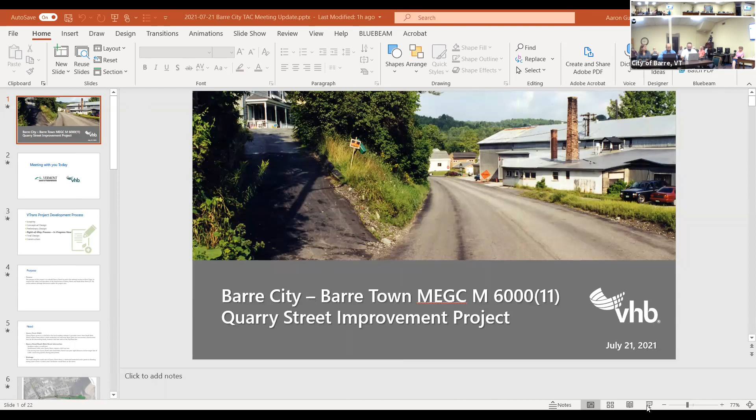Okay, we have a short PowerPoint presentation that we're going to share, and then we'll get into questions and answers toward the end. I would say though, if you have any questions about specific material we're talking about, or the slide we're on, feel free to just speak up.

So this is the Barre City, Barre Town Quarry Street Improvement Project. This is a Class 1 town highway project, meaning that both Quarry Street and South Main Street in this area, Vermont 14, are both Class 1 town highways. The project is mostly within the city of Barre. There's a small portion that's also in Barre Town. So as we mentioned, meeting with you today is Patty from the Agency of Transportation, and then myself and Jeff from VHB.

Just quickly, a reminder about the V-Trans project development process. This is the process that basically every project that's developed by the agency goes through. There's an initial scoping phase, conceptual design, preliminary design, a right-of-way process, and then final design and ultimately construction. So right now we have completed preliminary design and are currently in the right-of-way process.

Wanted to revisit the purpose and the need for the project. So the purpose of this project is to rebuild Quarry Street to match the widened section in Barre Town, to improve the safety and operations at the intersection of Quarry Street and South Main Street, which is Vermont 14, and to address drainage deficiencies within the project area. And then the need for the project is really targeting three separate areas: the width of Quarry Street, the Quarry Street and South Main Street intersection, and then drainage deficiencies.

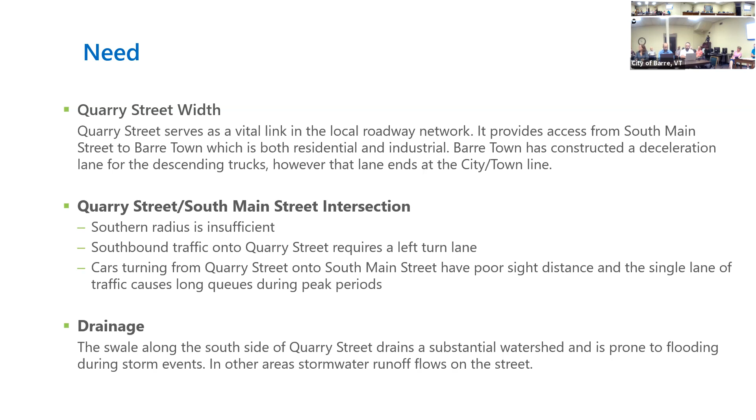And then on the drainage side of things, again, prior to any work on the project, a swale along the south side of Quarry Street drained a substantial watershed. It still drains a substantial watershed, and it's prone to flooding during storm events. And then there are other areas of stormwater runoff that just flow onto the street. Not really the best situation. So that's just a review of the purpose and the need and why the project is happening.

A very quick overview of the project here. Make sure my cursor shows up. Yep. So on the left-hand side of the screen is South Main Street. North is up. There's a north arrow on the top right here. And then Quarry Street extends from the intersection at South Main Street, past Hale Street, and then up around the corner and then into Barre Town.

A couple of things to note here. The project does meet up with the existing deceleration lane that's coming down the hill from Barre Town. I believe it ends in this area. So part of this project is to extend that deceleration lane down to the intersection with Vermont 14. And then as we approach the intersection with Vermont 14, it serves as separate left-hand and right-hand turning lanes so that we have shorter queues along Quarry Street.

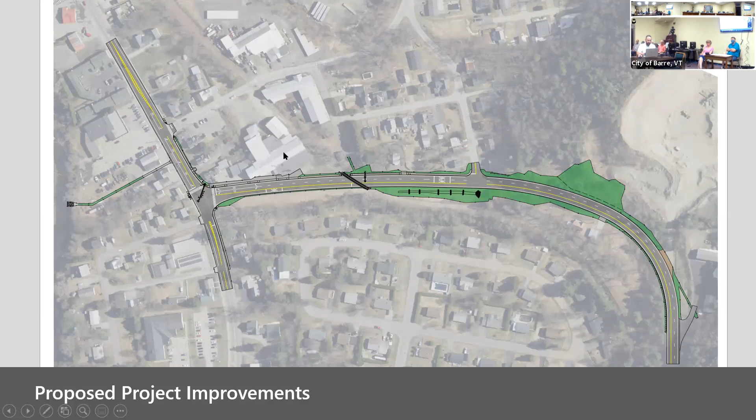Also along Quarry Street are drainage improvements, utility relocations, and an improved railroad crossing. The intersection becomes a signalized intersection. We talked about the lack of a left turn lane on South Main Street. So there is a left turn lane here shown for cars that are traveling south on Vermont 14 and turning left on Quarry Street. We'll get into a little bit more detail in some of the slides that come up.

I wanted to go through a few design considerations. So we are looking at a signalized intersection. The traffic volumes there do warrant the use of a signalized intersection. We're looking at improved intersection geometry in the final project. A portion of that has already been constructed in the field. We've talked about the South Main Street left turn lane, which would be constructed.

We'd end up with an improved typical section along Quarry Street. Right now it's very narrow. Pavement ranges from just over 22 feet to about 25 feet. And we're looking at adding 3-foot shoulders and a sidewalk along the north side of Quarry Street. We're looking at reconstructing that railroad crossing with safety improvements there, advanced warning, active warning system, drainage improvements, which will be both treatment of stormwater and conveyance of the stormwater, and then utility relocations along the corridor.

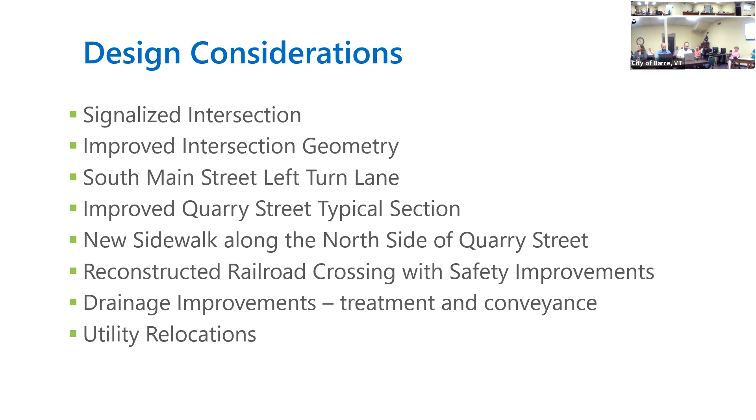So this is a zoomed in view of the Vermont 14 and Quarry Street intersection. As we said, we're looking at signalizing this intersection for the 3 legs, both the northbound and southbound on Vermont 14, as well as Quarry Street on the east. We're showing the new South Main left turn lane, which is shown a little bit clearer here in the zoomed in version.

There will be some pedestrian safety features, clearly identified crosswalks coordinated with the signal, so signalized phases for pedestrians crossing both South Main Street and Quarry Street. We've got the separated left and right turn lanes shown on Quarry Street so that cars that are approaching can navigate to one or the other lane. Again, reducing the queues along Quarry Street.

The improved intersection geometry, it was really this southern part of the intersection that was a very big concern. Previously, it was pretty much just a T intersection and trucks had to navigate into oncoming traffic to make that turn. And then improved operational safety on Cherry Street as part of the intersection improvements and the signalization. Cherry Street in this section would be converted to a one-way in. So vehicles can only enter here and then would exit a short distance further to the south.

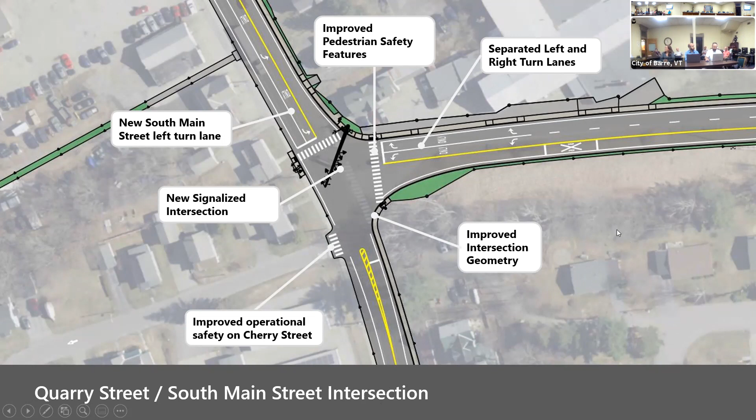This is a typical section along Quarry Street. This section represents the area between South Main Street and Hale Street. It's got the 3-foot shoulders that we talked about, 2 11-foot travel lanes in the westbound direction, 1 11-foot travel lane in the eastbound direction, and another 3-foot shoulder. Granite curbs on either side to help convey the stormwater, and then a sidewalk on the north side of Quarry Street. After we go beyond Hale Street, we don't have a sidewalk anymore, but the typical section of the roadway does continue.

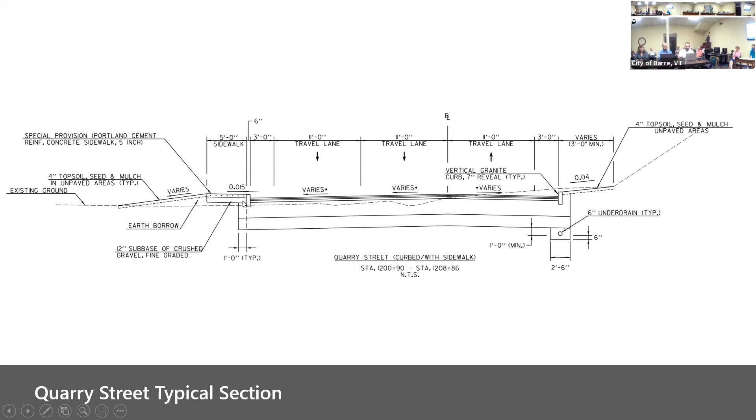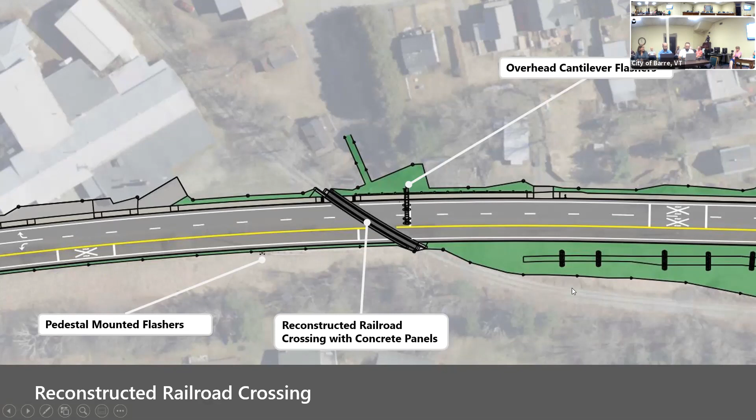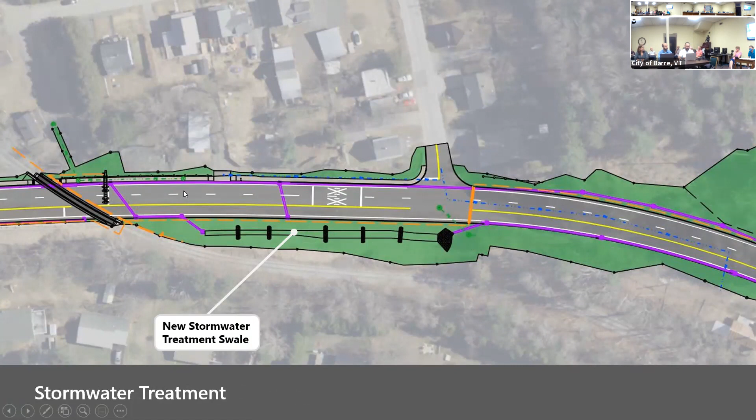So I just wanted to pause and talk about how the project has had one phase of construction in the field already to really cut back the bank here, cut back this slope to make way for the widening of Quarry Street. One of the biggest reasons we had to do it as a separate phase is to allow for relocation of those utilities ahead of the widening project. So the second construction phase was completed in 2017, cutting back that bank and installing a small retaining wall.

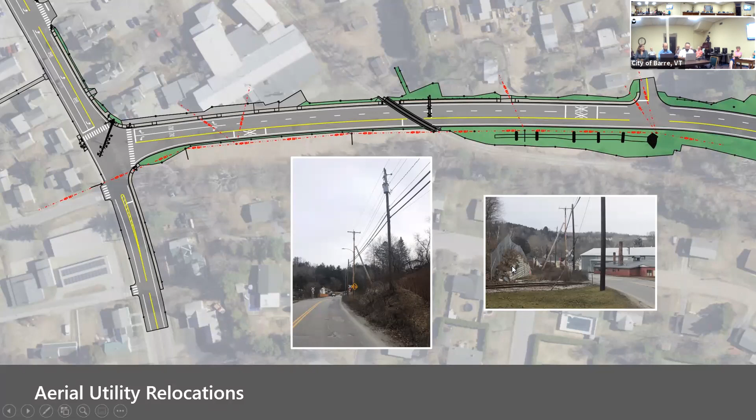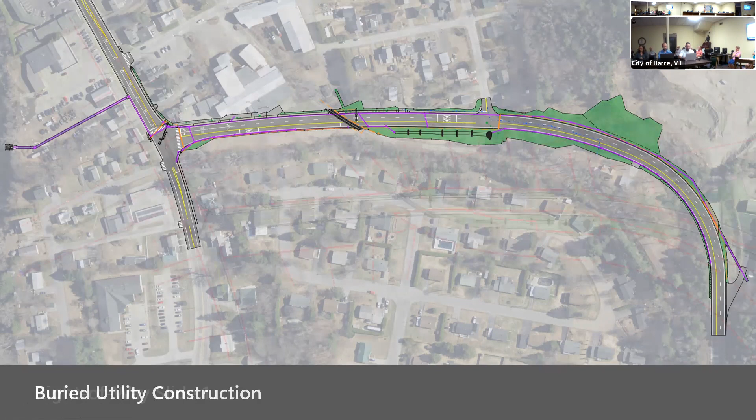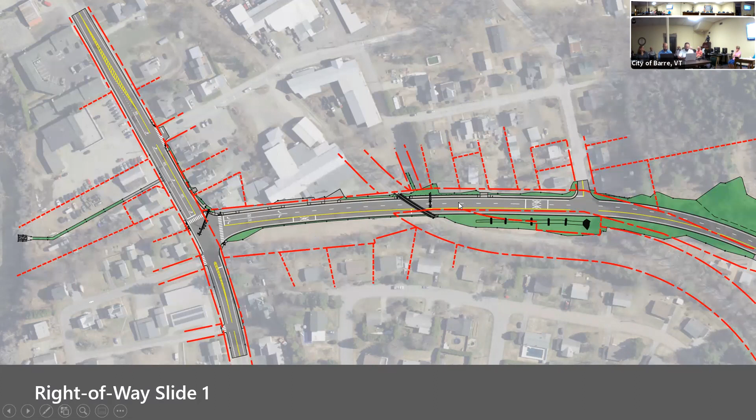We found in our right of way research that the existing roadway is really outside of that right of way. So as part of the project, we are going to clean up all the right of way so that in its final form, we will establish the new right of way, purchasing right of way on the city's behalf that encompasses the entire new roadway.

So just a recap of project construction. I misspoke earlier when I was talking about the first phase of construction. Really, the first phase occurred in 2013 with removal of the houses along the south side of Quarry Street. I believe there were 4 properties there that were purchased and the residences were demolished. This allowed for some temporary work to be completed to improve that intersection geometry. The southern side of that intersection is now much wider than it was previously, allowing trucks to navigate that turn a bit more successfully.

Phase 2 was completed in 2017, and that's the slope work along the south side of Quarry Street, pushing that slope back and installing a small retaining wall. And then phase 3 is targeted for 2024. That would include the rest of construction: the utility relocations, all of the roadway work, the widening, the railroad crossing, and intersection signalization.

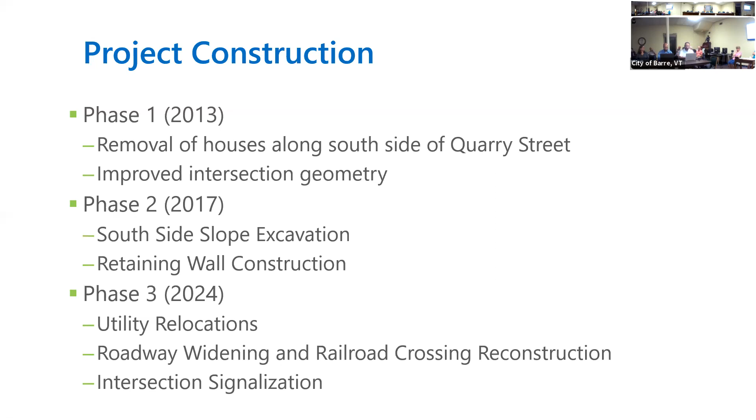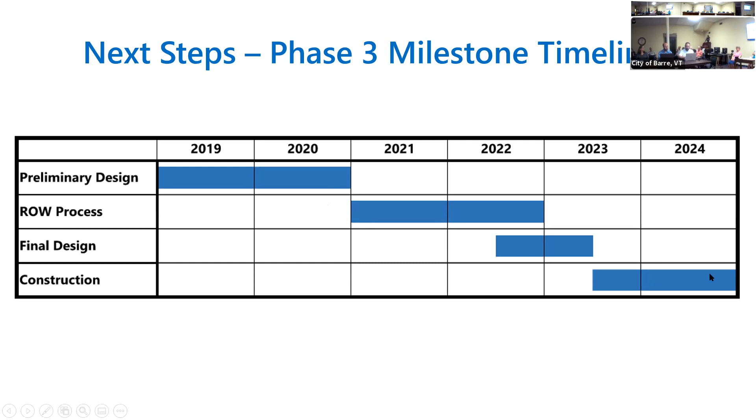I did want to mention a few project risks that we've identified. Traffic control for this project. We are working through traffic control phasing right now, so we do identify that as a risk for potential delays during construction, and we'll be taking a very close look at that.

Right-of-way acquisition. Anytime we need to buy permanent or even temporary rights, we need to go through the Uniform Act. I forget the full name of it, shortened to the Uniform Act, which VTrans will be purchasing rights on behalf of the city. But we do need to negotiate with property owners; if negotiations go longer than anticipated, it could mean short delays in the project.

We do have the utility relocations to plan for. While we have a full grasp of the buried utilities, the aerial utilities are all owned by private companies, so we would need to coordinate with those companies to move their utilities. Material cost escalation, I think, is something that we're all concerned about all the time, but especially recently, we've seen material costs soar. Hopefully they stabilize again.

Subsurface conditions: while we do make an effort to have subsurface investigation plans and complete those and take samples, it is still very difficult to fully characterize all the subsurface conditions, so I think that's usually a risk with projects. And then contaminated materials. We've done a desktop screening. We feel it's probably a lower probability that we encounter contaminated materials, but there is that possibility as well, especially in a developed area such as Quarry Street.

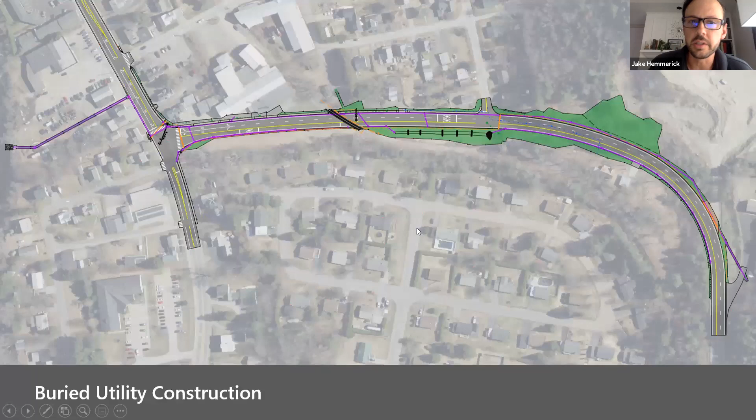Jake? One question I have is the impacts to the residents on Hale Street and the adjacent other residential properties. Are there any design features to mitigate the negative impacts of additional truck traffic, such as a raised berm or vegetative plantings, or potential buyouts? Because I suspect some of their property values are going to drop. And when I look at this project, I see a project that has already destroyed grand list value in the city. You said we've removed 4 tax-paying properties.

We get about $147,000 a year, as I understand it, in state highway aid to run a 50-mile system, enough road to drive over to Lebanon, New Hampshire. We struggle to keep up, and this looks like a new $7.8 million liability with ongoing operational costs related to stormwater and striping and signal maintenance. And so I'm concerned about the city's financial sustainability to be able to do this.

We have a $12 million annual budget. So you can imagine, a $7.8 million project and a $12 million budget, and thinking about the ongoing operational costs, and the fundamental basis for us being able to provide transportation services throughout the city is our real estate value. And so what's being done to protect the real estate value that remains adjacent to these improvements?

Well, I guess I'm not completely sure how to answer that question. I think it's an existing transportation facility right now. There are going to be some right-of-way acquisitions. We're not planning to acquire any additional full parcels, so it's just parts of parcels. So I think, in the end, the biggest impacts are the south side, which are already completed. And then the north side should be fairly similar as it is today. There will be some impacts.

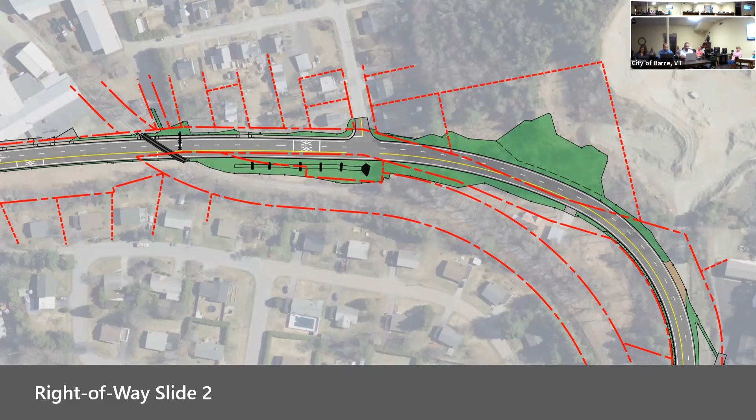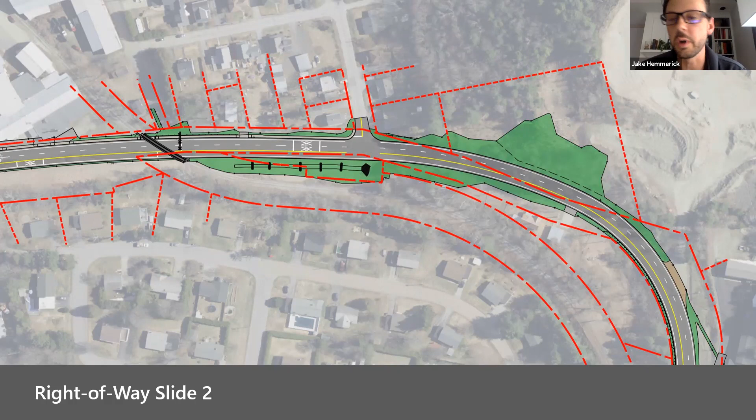And when it relates to the pedestrian features, I live on a fairly busy street, and when I have a logging truck roaring down the hill at 45 miles per hour and a sidewalk with no separation from the lane other than a shoulder, it doesn't feel particularly safe as a pedestrian. And I'm curious if this design has really done everything it can to minimize the geometry to both accommodate trucking and freight traffic, and at the same time make sure that the crossing distances and the security features for pedestrians have been enhanced.

Yeah, they certainly have been enhanced. I can tell you firsthand from being out there myself, walking on the side of this road, it's gonna be a lot better situation than it is out there today. The 3-foot shoulder, the 5-foot sidewalk, raised sidewalk, so on top of a curb, will be a significant improvement. Not to mention the improvements at the intersection with the signalized, phased pedestrian phases.

And so my question about the additional lane: you're saying it is warranted to have an additional lane past the turnoff, that we need that additional width, based off engineering studies for the current traffic right now?

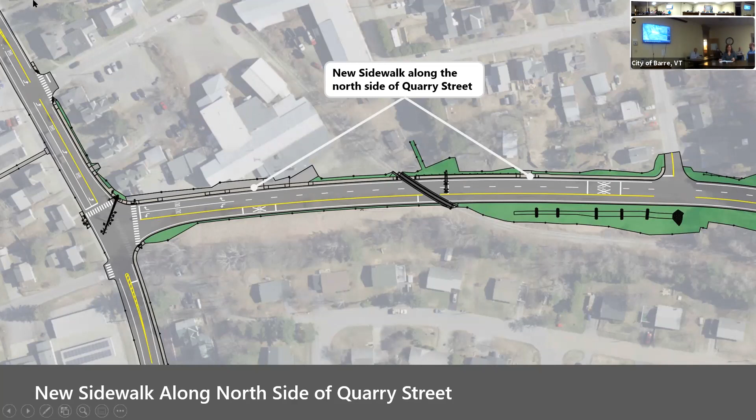I would like to thank you for coming in and presenting this to the committee. Yeah, thanks for having us. We look forward to having a few more meetings. The Merchant Street, I don't know if anyone has any questions on those. Do you folks have any information available for Merchant Street tonight, or is that something that we could ask you to come back for? So it actually is a different project team. Very good. It has the Merchant Street intersection, but I'm happy to pass along the message and they can certainly come in. Thank you.

We'll move on to the speed bump, Seminary, Shirley Street, Josh Peters. Hello, can you hear me? Okay. Thank you for your time tonight. I'm not sure how most of these proceedings go. I've only been to one other meeting like this before, but I was invited, and I am excited to talk to you guys about this.

I am actually currently right now in front of my house, and the intersection I speak of is right behind me. This is the intersection between Seminary and Shirtlift Street. Right here next to this pole is a bus stop for the children of Shirtlift, Seminary, and Brook Street, going up to Barre City School for the elementary school. This street is hazardous in ways that I cannot deny, but what I am coming to you today about is actually just getting a simple speed bump to slow down some of the traffic that travels this road.